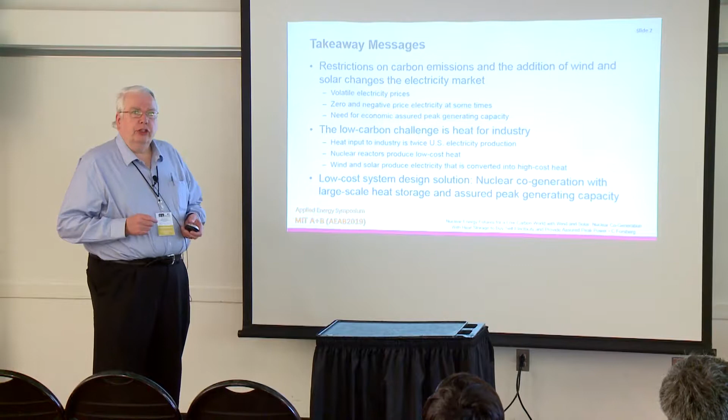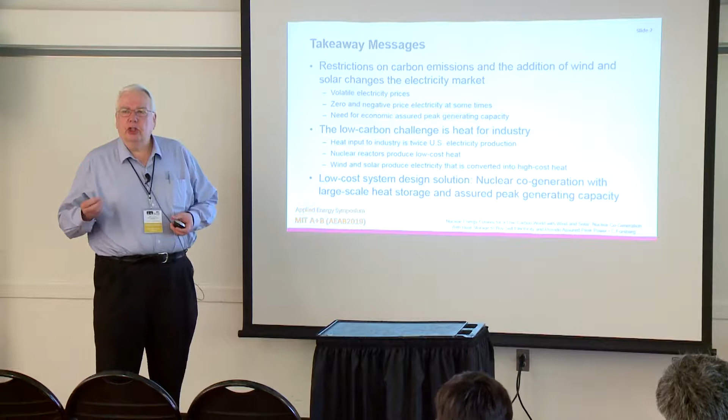Takeaway messages. There are 3 of them. Restrictions on carbon emissions and the addition of wind and solar changes the electricity market, in particular 3 ways: highly volatile electricity prices, 0 and negative electricity prices at some times, and the need for assured electrical generating capacity, no matter what the weather conditions are outside, no wind, no solar, other constraints.

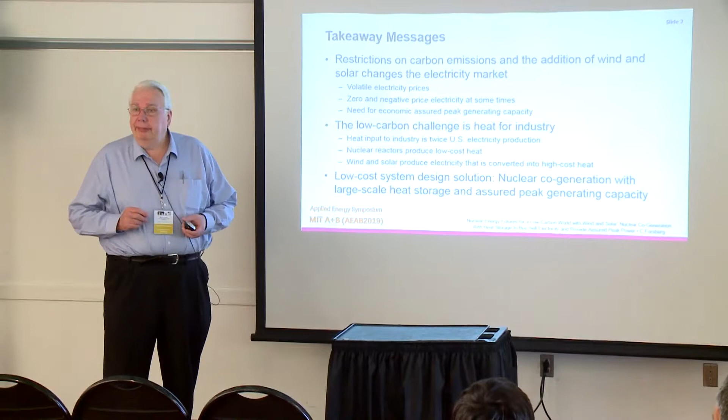A second observation, or takeaway message, is the really big challenge is heat for industry. The electricity sector is the easy problem, so important to keep perspective. In the United States and in Japan, the heat input to industry is about twice the total electricity output.

Nuclear reactors produce low-cost heat. Wind and solar produce electricity that can be converted to heat. But if you start with an expensive energy product, electricity, you end up with an expensive heat situation. For that reason, I'm going to discuss a low-cost system design solution: nuclear cogeneration with large-scale heat storage and assured

electricity generating capacity. I'm not talking about any specific reactor. I'm talking about the system design, which is distinct and separate, as we will be discussing.

I'm going to start, of course, and actually spend about 1/3 of the time describing what are the low-carbon challenges. And I'm going to look at it from 3 perspectives. What are the wholesale electricity markets telling us today, recognizing they're in transition?

What is the optimum system to minimize cost of electricity in a low-carbon world? That's a modeling exercise, but of course all models depend upon assumptions. And last, what is the main non-electrical low-carbon challenge? So let's take a look at the nature of the problem.

What are the wholesale markets telling us today? I'm going to use the California case. Here we show the price of electricity in dollars per megawatt hour on the wholesale market over a 24-hour period of time in the spring in California.

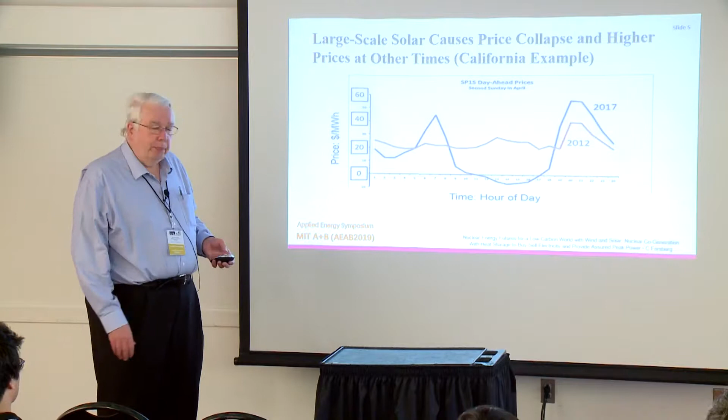What happened is they added enough solar to drive the electricity price to zero when the sun was out and shining. Now, there are a bunch of constraints on this. There were some subsidies, so they actually went negative. That'll eventually go to 0 when the subsidies disappear. But it tells you what the radical changes are in the electricity grid.

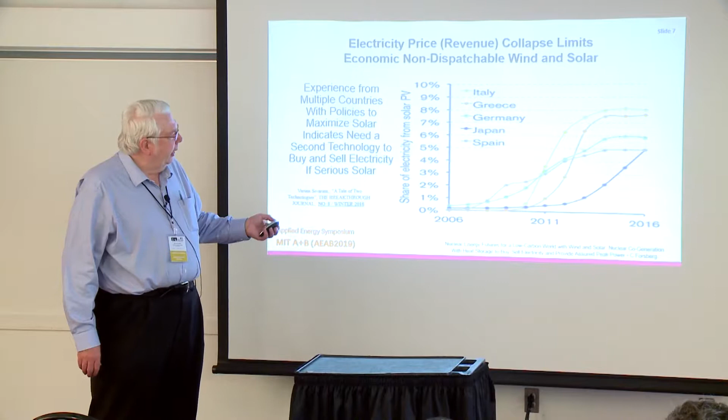Now, this has longer-term implications. I'm going to use some data from the real world, which shows that electricity price collapse limits economic non-dispatchable wind and solar. This shows the share of all electricity produced in 5 countries by photovoltaic: Italy, Greece, Germany, Japan, and Spain.

Each of these countries initiated a very large PV solar program. The result was a rapid takeoff in electricity production, and then it flattened out. It never got above 8% in Europe.

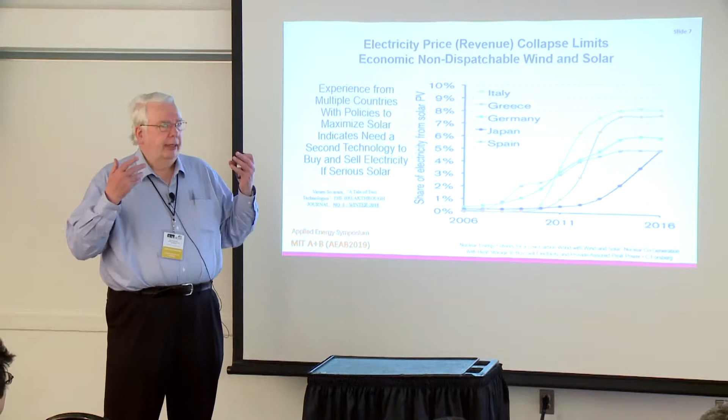What happened? By the time they got to 8% in Europe, the PV was providing so much electricity that in effect it collapsed the market, and if you built a new PV system and put it online, there was no place to sell the electricity. It saturated the market, complete saturation.

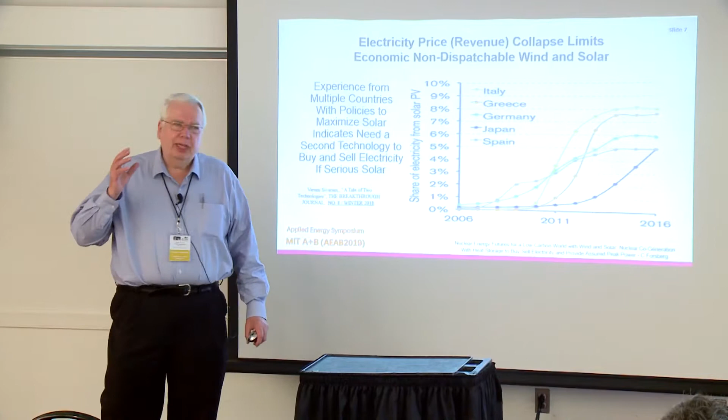Now, we do not have the wind data yet. We're going to have to wait probably 2 to 3 years before we get real experimental data. I like experimental data, probably from the Great Plains of the United States and from Germany, but it looks like wind is going to play the same game at about 20–25%.

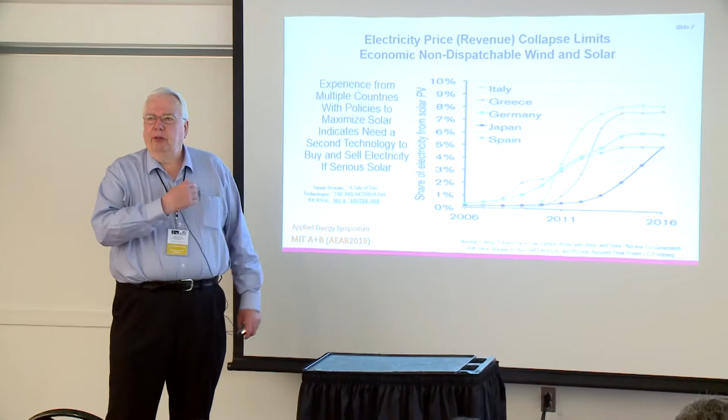What I should also note, by the way, is all the models predicted the saturation effect would occur at a much higher level than it actually did. So much for our modeling capability.

Let's look at the models. What is the optimum system to minimize the cost of electricity in a low-carbon world? In short, what do the models tell us?

At MIT, we've been developing the GenX model to determine optimum electricity generation. It minimizes the cost of electricity with greenfield assumptions. Important caveat: the inputs include hourly electrical demand and weather patterns, capital, operating and maintenance costs, fuel costs of power plants—nuclear, wind, solar, fossil, with and without carbon capture, and backup and storage options.

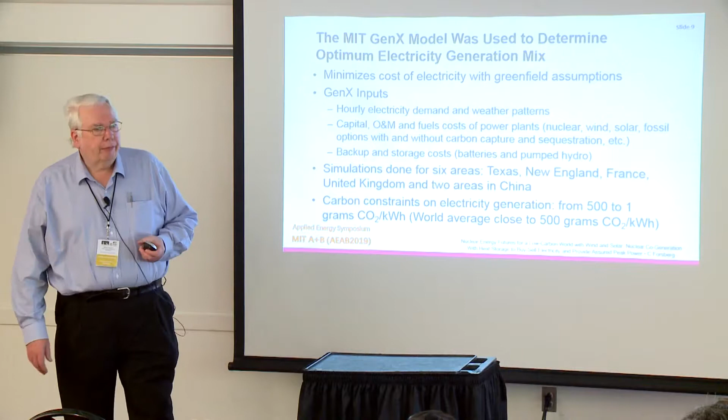Simulations were done for six parts of the world: Texas, New England, France, United Kingdom, and two areas in China. Each of these areas has different quality solar, different quality wind, and different cost structures. We looked at different carbon constraints, from 500 to 1 gram of carbon dioxide per kilowatt hour. Today, the average CO2 emissions of a typical electrical grid are about 500 grams per kilowatt hour.

Let's take a look at Texas. Before we do, a couple of things you need to understand: it's got low-priced natural gas—nobody's got cheaper gas than Texas. It's got great wind and great solar. And it has expensive nuclear. So this is the place to be if renewables is your game, wind and solar.

At high CO2 emission limits, it turns out you don't build any nuclear. What you build is natural gas, natural gas, natural gas, and a little bit of wind—because if there's no carbon dioxide emission limit, nobody beats gas in Texas.

When you begin to constrain carbon dioxide emissions, you start to see changes—a little more wind to reduce the use of natural gas. And when you go to very low emissions, the low-carbon option without nuclear becomes much more expensive. What's happening is the cost of batteries and other components to deal with the intermittency of wind and solar rises, and nuclear becomes by far the cheap option.

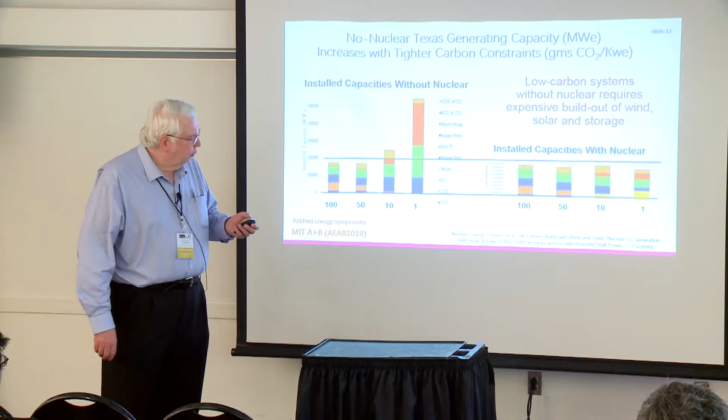Now let's go further into what drove up prices in Texas. This is the Texas no-nuclear generating capacity as carbon emissions limits change. This shows installed capacities without nuclear, and this shows installed capacities with nuclear. What you see is that if you don't have nuclear in the system, you end up buying a lot of batteries, oversizing the amount of PV, and oversizing the amount of wind. That additional capacity is what's driving up the electricity price.

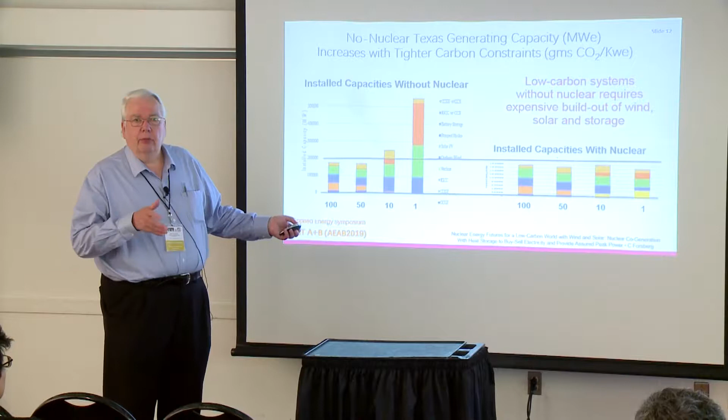Whereas with nuclear in the mix—a mixture of wind, solar, and nuclear—nuclear provides the dispatchable electricity and minimizes the overbuilding of PV, wind, and solar. In these low-carbon scenarios, nuclear energy provides the dispatchable electricity the system needs.

When you get down to very low carbon emissions, the nuclear plant is changing its operations 1,600 times a year, doing load following—essentially replacing the function of a gas turbine in today's electrical grid.

Last challenge is, what is the non-electric heat challenge? The other half of the challenge, and that one's very obvious, it's industrial heat. Industrial heat input to industry is twice the electrical output.

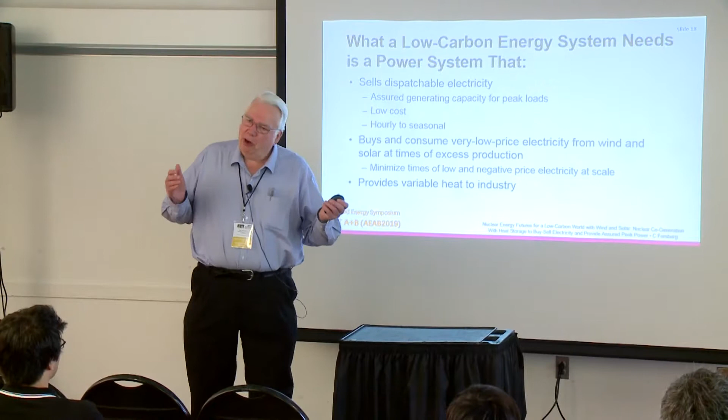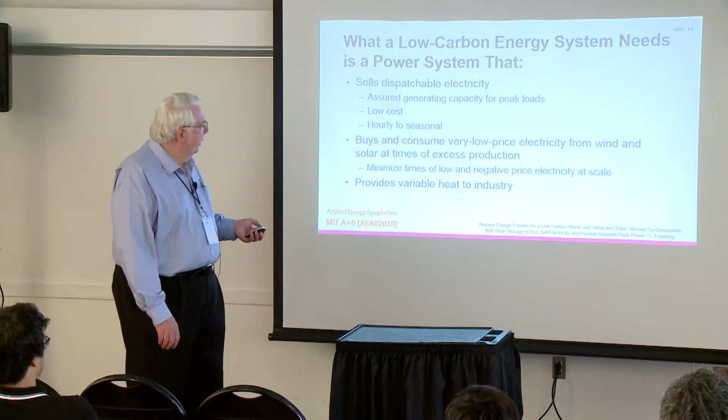You can use taxpayer revenue, but that gets to be a very expensive option. So we need to buy electricity if the price gets too low. And last, we need to provide process heat to industry.

This leads us to a new nuclear system design. We have here the baseload reactor. The reactor operates at steady state. It could be any type of reactor. This is not specific to a particular nuclear technology.

Produces steam. The steam can go in two directions. First, it can go to the turbine hall where heat is converted to electricity to produce dispatchable electricity to the grid. If there is a low demand for electricity, heat from the reactor is sent to a heat storage system where we store that heat, where we heat up some material, hot salt, hot rock, hot sand, hot concrete.

There's a list of about 20 of these, and we store heat in this system. If we need a lot of electricity, we have the full power of the reactor going to the turbine hall, producing steam, and steam from heat storage going to the turbine hall to produce more electricity. So we produce peak electricity in a dispatchable form.

Now we have on the system wind and solar. When they're available, that's fine, but they may crash the price of electricity, and we have excess electricity. If we have excess electricity on the market, that means zero priced electricity, or electricity less than $10 a megawatt hour. We buy the electricity, and we convert that excess, very low priced electricity into stored heat that can be used to produce peak power at other times.

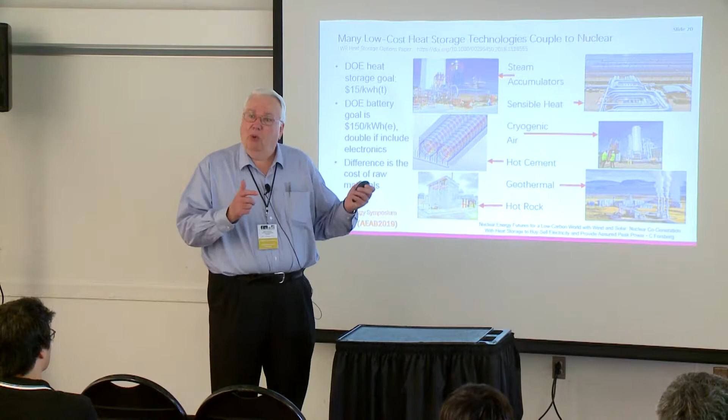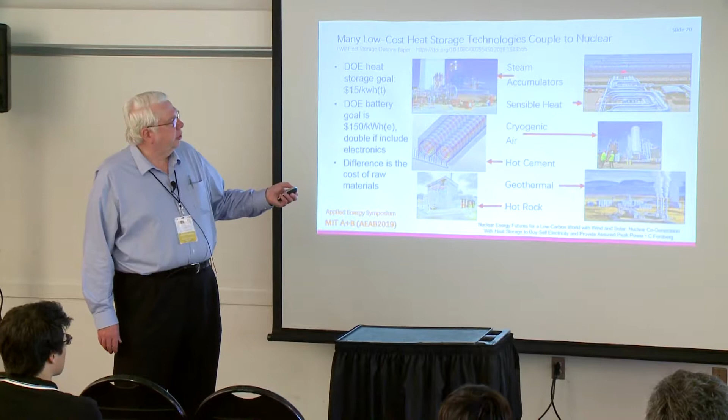Not small scale. Several technologies are deployed. Steam accumulators are deployed at a number of solar power plants. Sensible heat storage is at some other facilities. This is where you heat up hot oil, hot salt, which is done commercially today, but there's a whole bunch of other processes under development that I'll briefly describe.

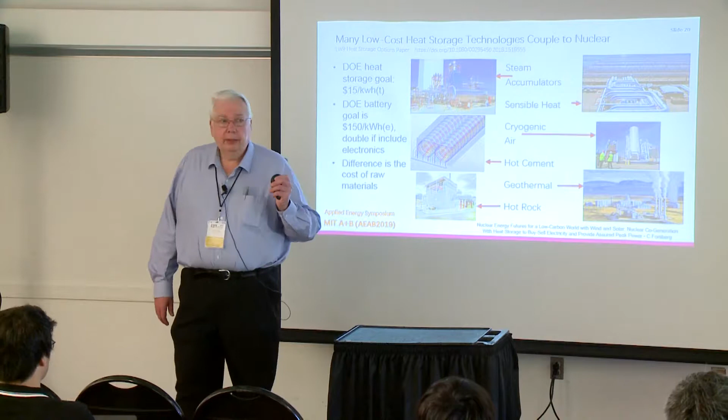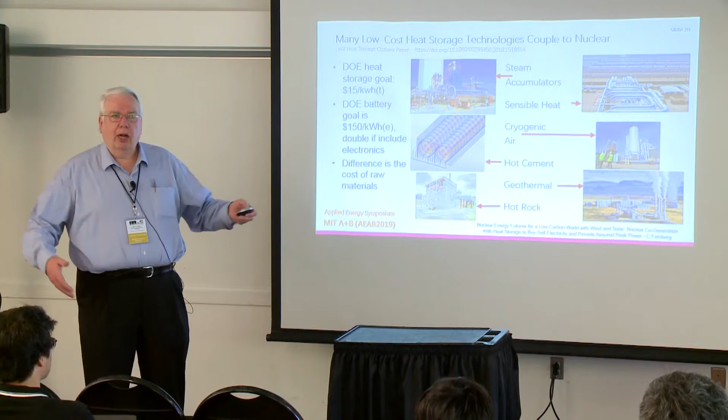There's something called cryogenic air, which is a talk all unto itself, so I won't cover it. People are working on hot concrete or hot cement. These would be steam coils buried in a cement monolith, designed to go up to 600 Celsius. So this is not your normal Portland cement used for roads. People are working on hot rock, and they're working on geothermal heat storage, where you heat up a chunk of rock 300 meters by 300 meters, 2 kilometers underground for seasonal storage. In all of these cases, you dump the heat in, you take the heat out when you need it.

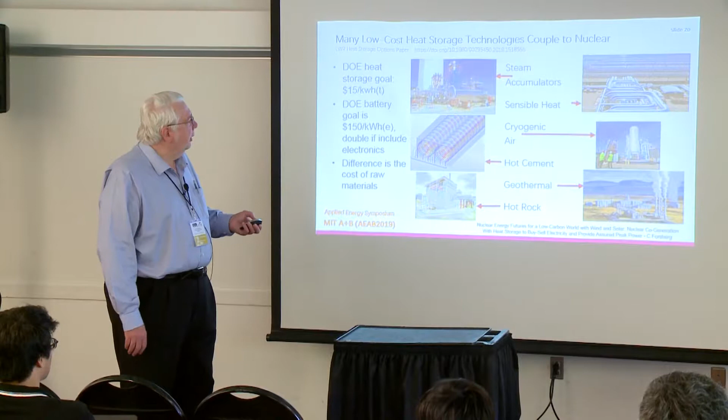Second observation, if heat storage, buy low-priced electricity and convert to heat for later use. And this is the issue of very low-priced electricity. So you buy low-priced electricity, use resistance heaters, and convert the electricity into heat. Now, what is very important here is this is a really low-cost storage option.

And the reason why, if you think about it, well, let's see. I'm a power plant. I'm selling electricity to the grid. I own transformers, grid connections, switchgear. That same equipment that's used to sell electricity can be used to buy electricity. No additional capital cost. I've already bought my heat storage system for other purposes, so all I have to do is make this heat storage system incrementally larger.

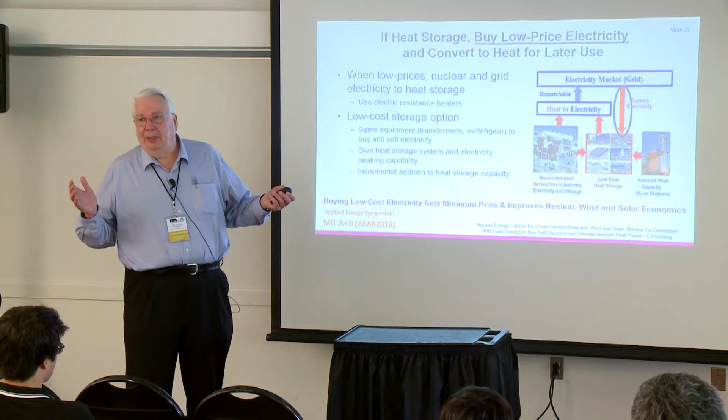And so with this type of system design where you have heat storage coupled to a heat generator, you have the ability to buy electricity when it's cheap at very, very, very low cost. This is currently being considered by a number of solar systems in the Southwest United States. I have not heard yet a decision to actually implement it. There's some regulatory rules that have to be addressed. But my guess is that people with heat storage are going to gobble up cheap electricity if somebody wants to sell it at under $10 a megawatt hour.

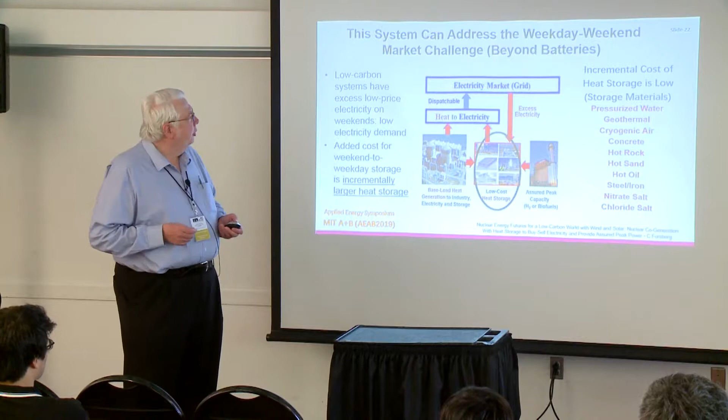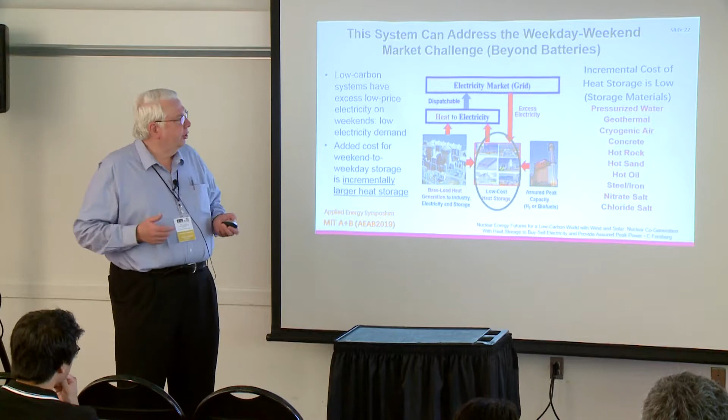Second observation, this kind of system can address the weekday, weekend market challenges. Low carbon systems have excess low price electricity on weekends because of low demand. Five-day work week, weekend much lower electricity consumption, lots of excess energy. And what that means is on the weekend, you can buy that excess electricity and dump it into storage. And of course, the reason that works is the incremental cost of heat storage is very low.

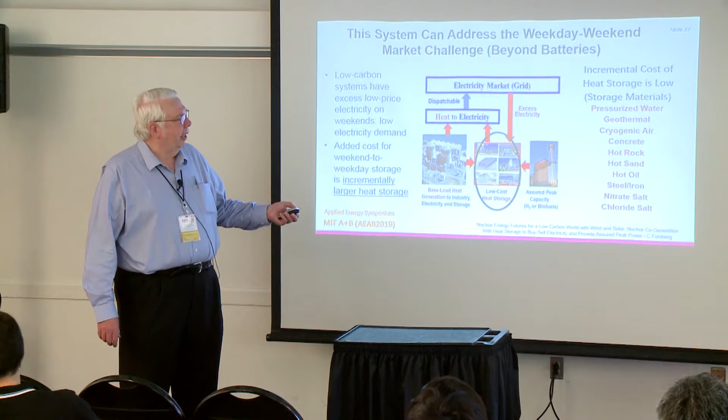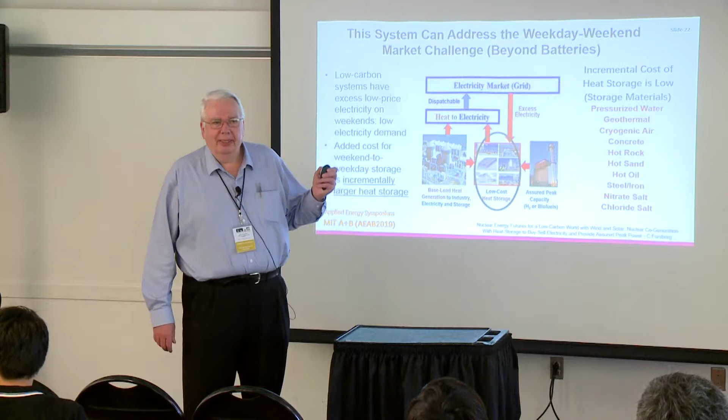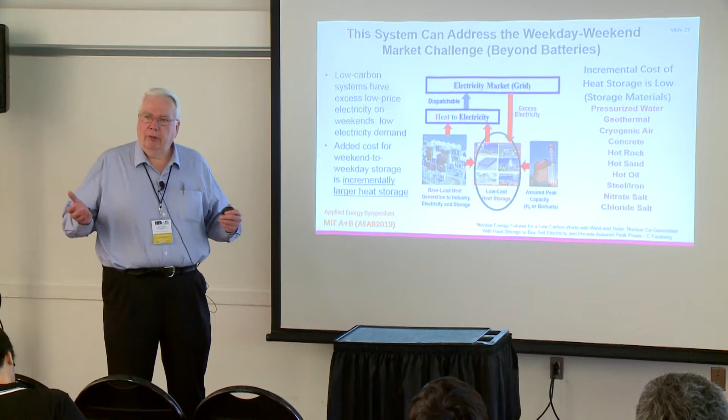And this is what we're talking about, the incremental heat storage costs, whether you're talking about pressurized water, geothermal, cryogenic air, hot concrete, hot rock, hot sand, hot oil, hot steel, hot nitrate salt, or hot chloride salt. That's the list that there are currently significant programs in, by the way. It's not clear which heat storage technology will win. Probably multiple ones will win because of different temperatures, but a lot of people are working on the problem either for nuclear reactors or for solar. However, it's the same technology, so a number of companies, the answer is we'll sell to whatever customer is available.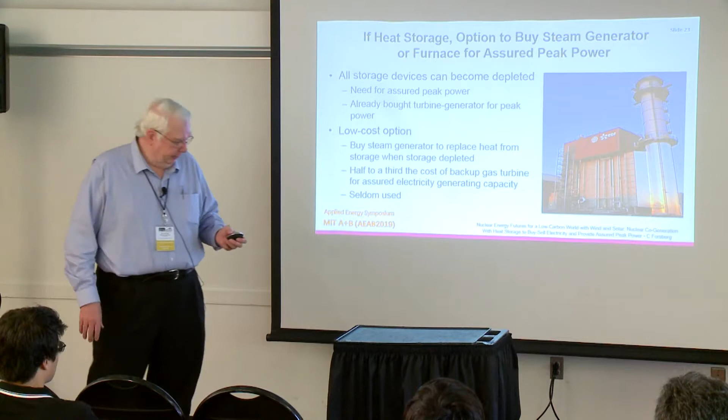Brief look at nuclear cogeneration, which is the other half of the problem. We did a GenX model of what happens if you tried to electrify industry, run electric wires to it, and see what the price impact is. The case we used was Texas, where you have an electricity option and try to electrify industry.

The reason the cost went down was the change in the optimum generating mix. You went from a mix of combined cycle gas turbines with efficiencies of about 62%, coupled with single cycle gas turbines at about 40% efficiency, because you have to meet variable electrical demands—so you don't build just one type of technology. If you add a lot of baseload technology, you better match electrical demand with production technology. What you find is with this industrial load, you end up buying all combined cycle gas turbines, and since natural gas is cheap, a combined cycle natural gas turbine is the most efficient machine on Earth to convert natural gas into electricity. So if you couple production with electrical demand for efficient use of resources, costs go down dramatically.

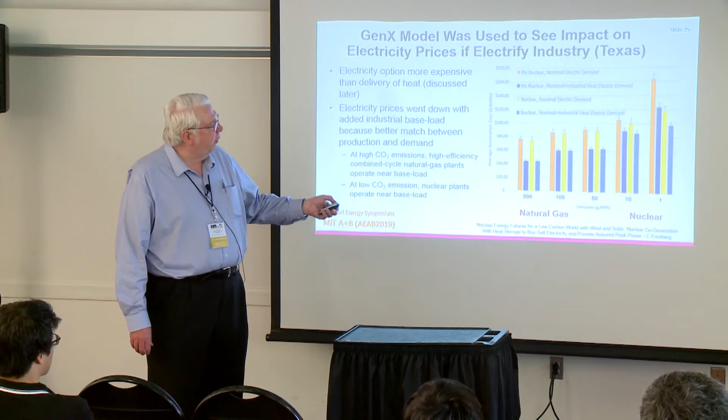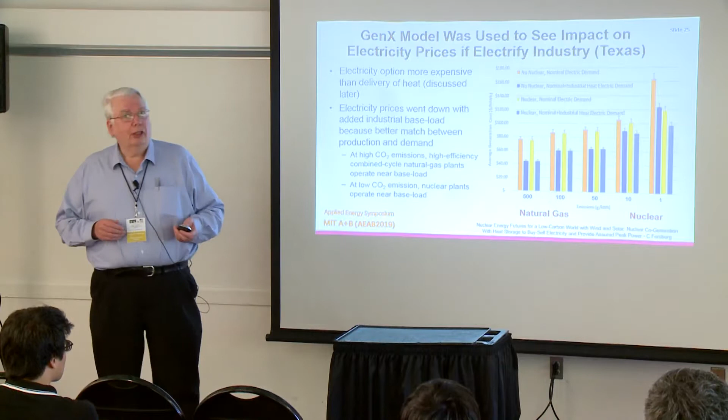So natural gas wins in Texas if carbon emissions are high or there are no carbon constraints. If there are serious carbon constraints, nuclear wins in the same situation. What happens is the nuclear plants operate essentially at base load or very close to it, producing most of the energy that goes to the industrial sector. So you have an efficient coupling between nuclear and the industrial suppliers. You do get more wind and solar here, depending very much on the actual price of PV and wind, and it varies by location. You'll get a fair amount of wind and solar in Texas, but not very much in New England, which has poorer conditions.

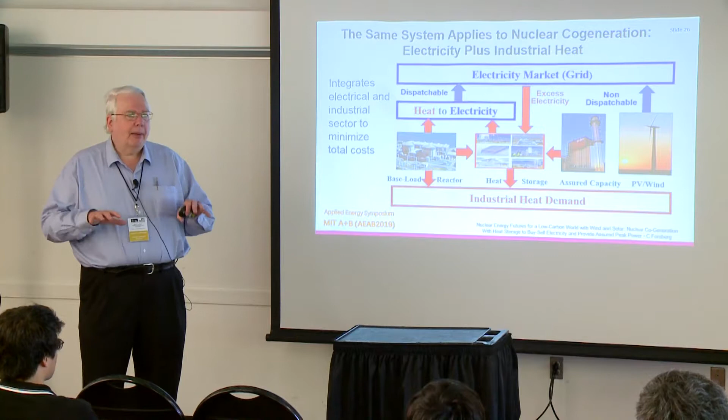Now, the same system applies to nuclear cogeneration. I have a heat production machine, a heat storage machine, assured capacity. The industrial demand goes here, and you couple the nuclear or electrical sector with the industrial sector. What that really says is you're optimizing costs over most of the energy demand of the US, not just the electricity demand. However you do it, if you can couple the industrial sector with the electric sector efficiently, it will drive down the cost. It doesn't matter what kind of technology you have, because it allows better optimization—you have more variables to change. That makes a tremendous difference in the cost structure of these systems.

Now, some characteristics of nuclear cogen with heat storage. First, integrate the electrical and industrial sectors. Second, which is not appreciated, some existing fossil cogen plants vary industrial production for more electricity production when there are higher electricity prices, and less production when demands are low. The same option applies for nuclear cogeneration.

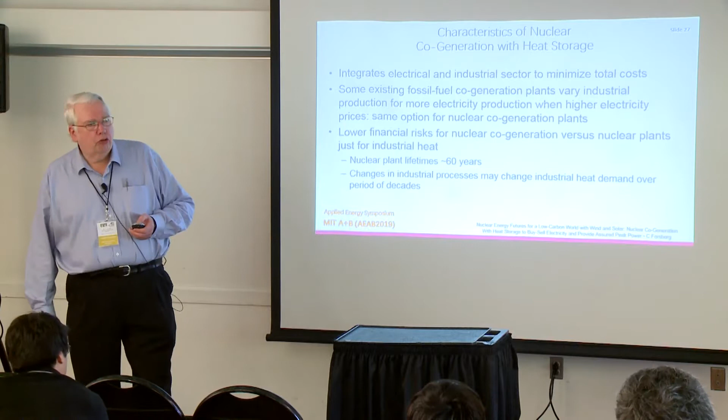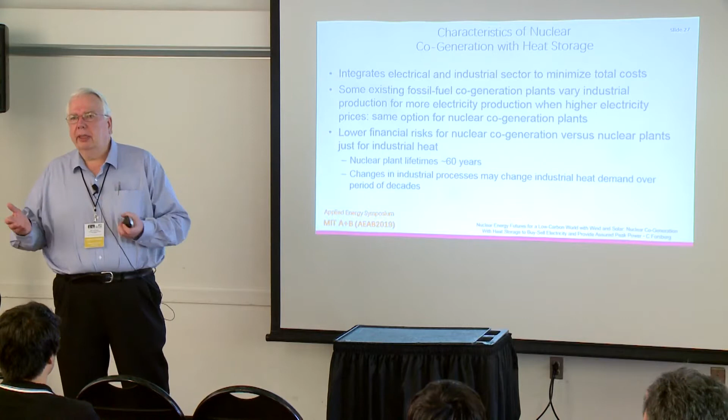Many of you are probably not aware of it, but there are many gigawatts of what they call cogen plants—electrical plants, fossil plants that produce heat, steam, and electricity. They need the steam for the industrial process and sell the electricity to the grid, but they can vary how much electricity versus how much heat goes to the industrial demand. Depending on the price of the industrial product versus the electricity market, they can vary production of the product versus electricity, resulting in significant savings to the overall system. So cogen is a really efficient way of coupling the two systems together to minimize costs.

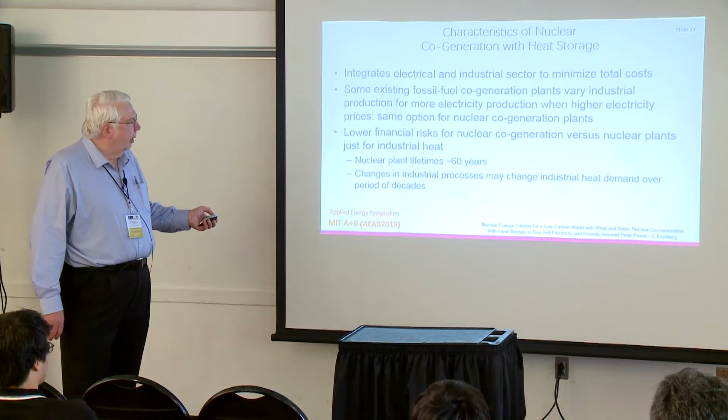Last, for the nuclear plants, there's much lower financial risk with nuclear cogen versus nuclear plants just for industrial heat. Nuclear plants have long lifetimes, and changes in industrial processes may change the industrial heat demand over a decade or two. So there's a lot of incentive from a financial point of view if you're in the cogen market.

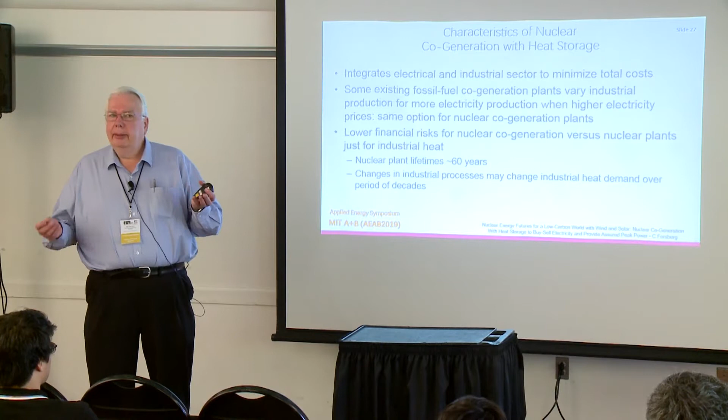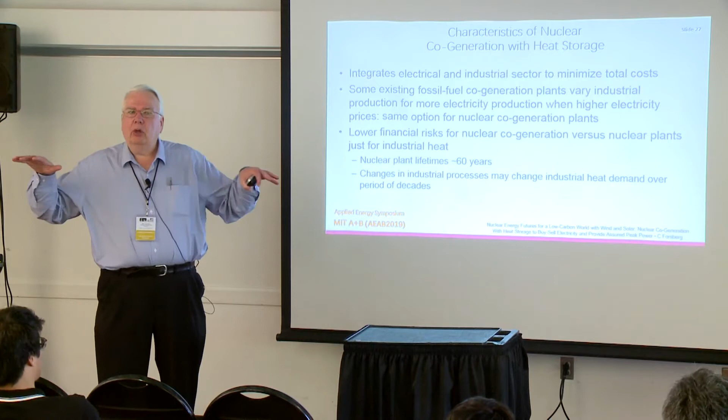But much more important than that cogen market is this ability to optimize a big chunk of the total energy demand of the world, not just the electrical sector, which is important but only one segment, without it being decoupled from the industrial sector. So you need to think about the whole problem. I'd like to emphasize you can't stovepipe. Stovepiping gets you expensive solutions. You have to consider the entire system.

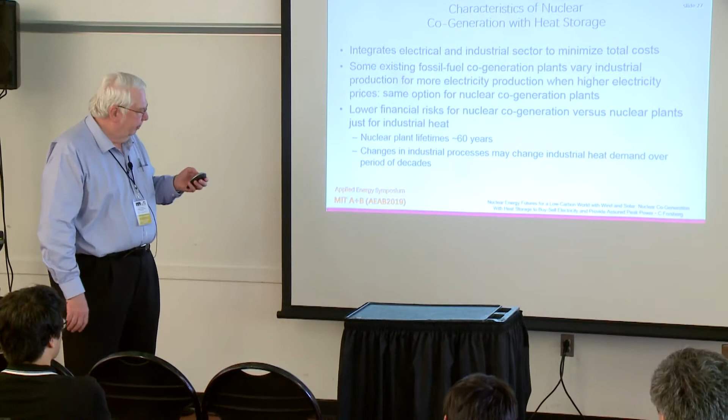I don't know if you've ever thought about it, but we haven't had an energy policy change in 300,000 years. Whether you're talking about the cooking fire of the caveman or the modern gas turbine, most of the money in both of those systems was collecting the fuel and bringing it to the fire. We've been operating that way for 300,000 years.

We're now in a situation where we're trying to kick out the fire, and we're buying capital-intensive technologies, wind, nuclear, and solar, and to make them work, we have to use them at high capacity factors. But the market is changing, and we're going to have to adjust the technologies to match it.